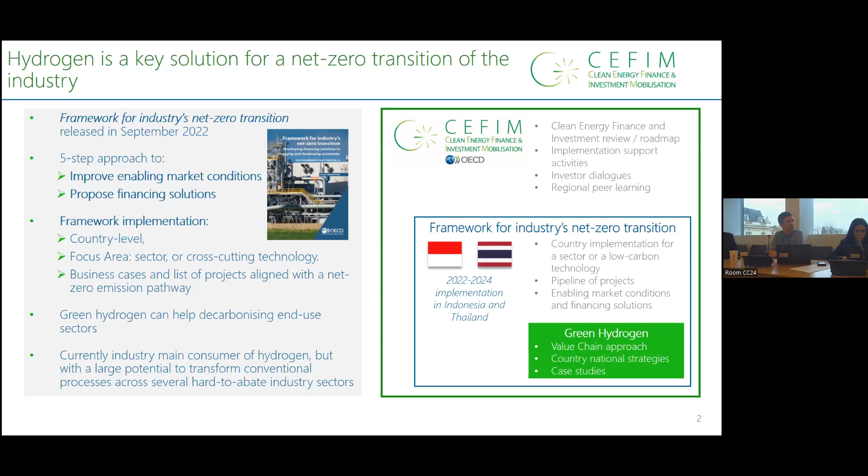This work that we have done on green hydrogen is therefore really much connected to the other activities we're undertaking in those countries. And in the paper, as you can see in the box in that slide, we have adopted a value chain approach to make sure that we're covering from the electrolyzer manufacturing to the end uses of green hydrogen. We have as well identified a few questions on how could countries establish national strategies to create enabling conditions. And we also propose 8 case studies of flagship projects.

So a very short reminder on hydrogen contributions to the global energy mix. Hydrogen is today well recognized as one of the solutions that can help achieving net zero by 2050. And most of the pathways that are aligned with net zero today show that compared to the current level of green hydrogen demand that you can see on the left bar in red, we will see a 5 to 6-fold increase in hydrogen use. And most of this hydrogen is deemed to be green hydrogen or low carbon hydrogen by the time.

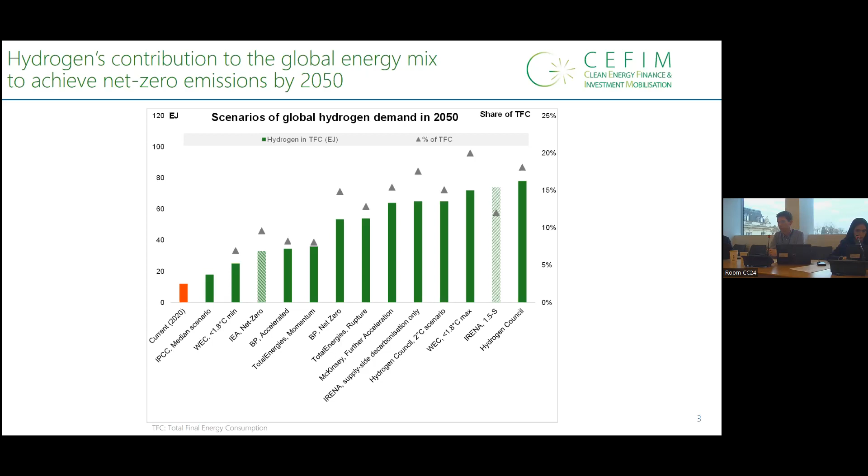Another key element, and this is really the backdrop of the working paper, is to address the entire value chain of green hydrogen. It's especially complex. So we have an upstream part, which goes from the manufacturing of electrolyzers that themselves can require critical minerals and therefore some mining activities, to the availability of upstream resources, which are primarily water, as well as cheap renewable energy or low carbon electricity sources. So primarily wind and solar today, but of course low carbon hydrogen can be produced as well, for instance, out of biomass.

On the midstream part, this is the production itself, and you can see here the importance of storage and transport. That means that enabling infrastructures will be key, and that having them in a country will be a critical area to develop a sound green hydrogen market. And you can as well see in the dotted line the conversion, transport, and exports to the downstream, meaning that green hydrogen is a molecule that can be used in the industry, but in order to trade it and to export it, it may have to be converted, for instance, under the form of green ammonia.

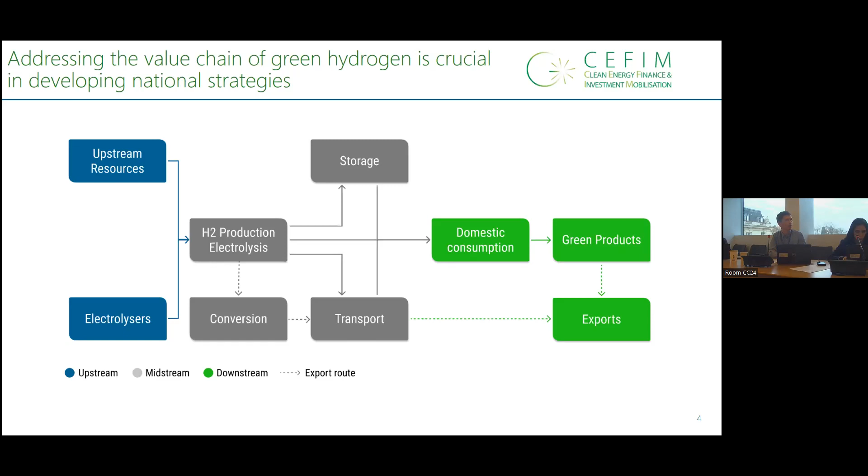Finally, what you can see on the downstream parts, and that is particularly relevant for emerging economies that have good conditions to produce green hydrogen at low cost, is that the consumption could take place, of course, as domestic consumption directly under the form of green hydrogen, could go through exports, but could also be done under the form of green products. And that means that having green hydrogen at low cost in the country could also provide an opportunity, for instance, to manufacture products such as green ammonia or green steel and develop the downstream industry.

So as we can see in the value chain, especially for emerging economies, there is a good momentum to develop green hydrogen, but it could be for domestic use as well as for exports. And we have also observed over the last years that many governments were working on partnerships to develop hydrogen trade.

This is illustrated as well by some of the first projects and large projects that we have seen in emerging economies. So here we just take an example that you can also find in the paper about HIF Global. It's a project of e-fuels production in Chile, so mainly on methanol. And the purpose here is to first produce green hydrogen, but also to combine it with CO2 capture in order to produce gasoline and export it then for the mobility sector across the world. So again, to emphasize the importance of trade for these first flagship projects to emerge.

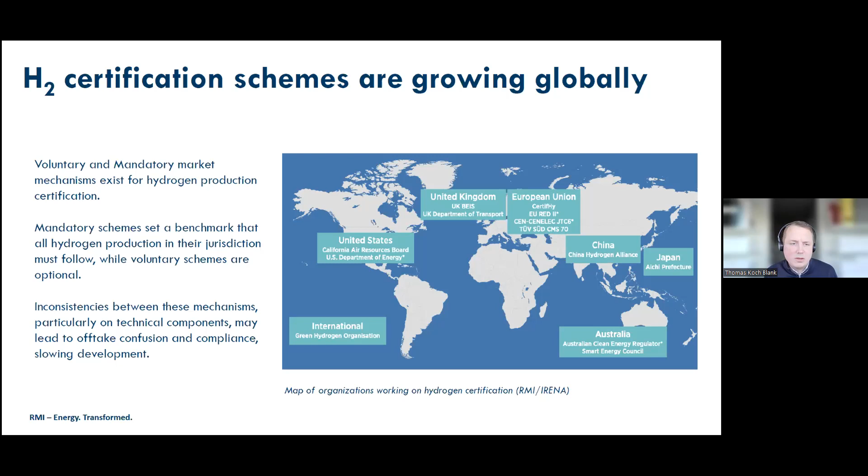So what is, I think, strongly recommended, or what we see is valuable, is that at least the technical components of the certification scheme become harmonized. So you harmonize on the scope of what you actually include and what you consider to be required to report on, if you like, as a basis for this attribute that you want to provide your customers. So what are the system boundaries? How far upstream do you go? Which components are included? Which kinds of greenhouse gas emissions, and so on?

Is it only a green hydrogen, to use the simple terms here, is it only a green hydrogen standard, or is it a standard that also allows for other production pathways to transact in the same market, and so on? So there are a couple of technical components that are important to align on, but achieving a single standard, as I think Sam also referred to, is unlikely, but harmonization and some level of compatibility will highly improve the transactability of the market. Next slide. And I'll leave you with this.

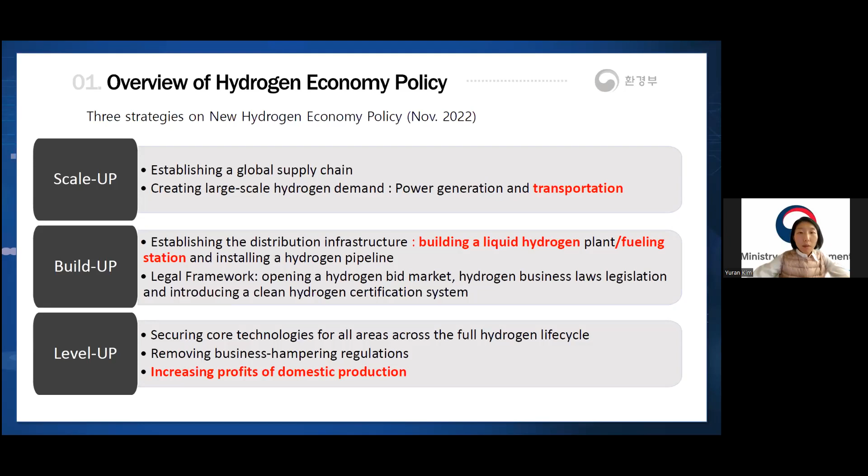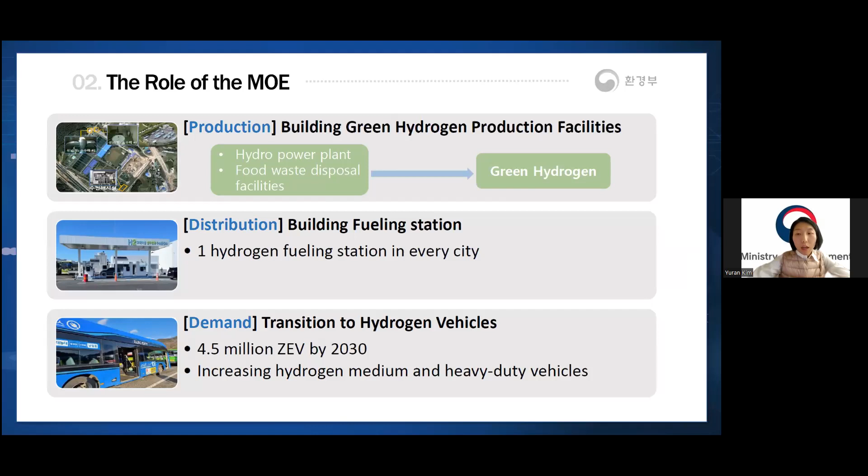Based on this plan, the Ministry of Environment is in charge of these red parts. Next, please. Here is the summary of the role of the MOE considering the life cycle of hydrogen. First, producing green hydrogen based on our environmental infrastructure, hydropower plants in water purification plants, or organic waste disposal facilities producing a lot of biogas, and building hydrogen fueling stations and supporting transition to zero emission vehicles, including hydrogen vehicles. Next, please.

The MOE has invested mainly in two types of green hydrogen production plant. Type A plants use water electrolysis technology in water power plants. K-Water, the public organization in Korea, started the first project in Seongnam, a city adjacent to Seoul, by using its small hydropower plant at a water purification plant. It is expected to produce green hydrogen this year and provide hydrogen to nearby fueling stations. There are two more similar projects in Chungju and Milyang. The Chungju project is the largest among the MOE's projects. Next, please.

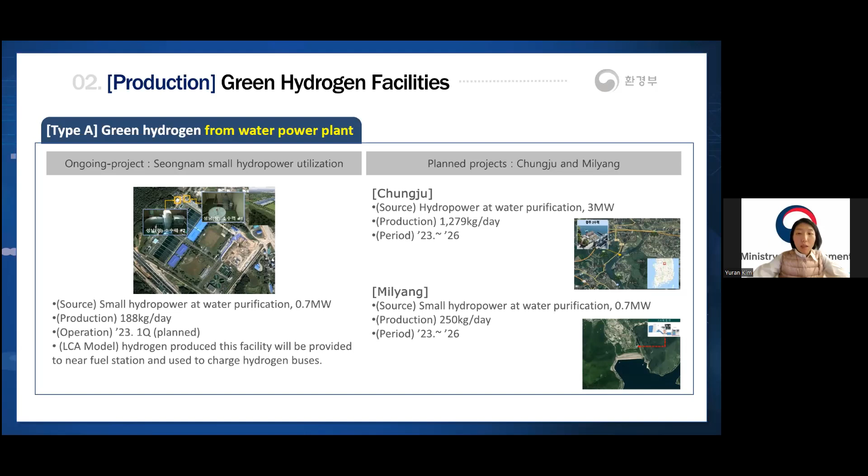Type B plants are at the very beginning stage, which extract hydrogen from biogas. Korea has above 100 biogas facilities treating organic waste such as food waste or sewage sludge. The MOE has a plan to select two projects in 2023. Next, please.

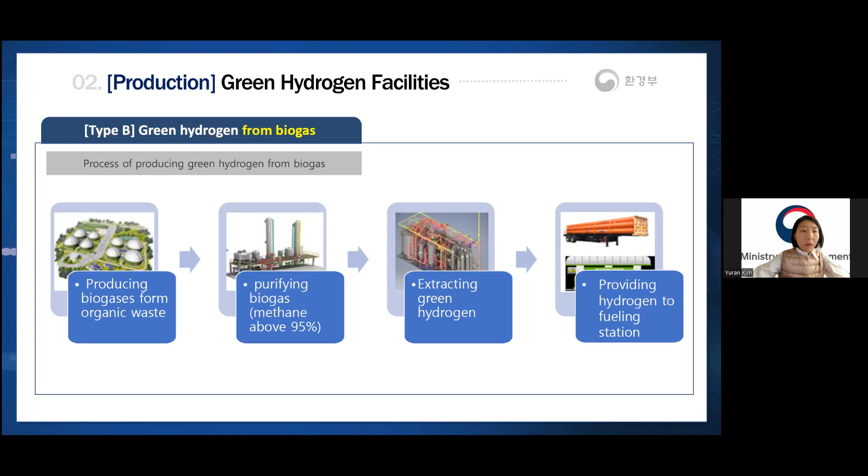The next part is about hydrogen fueling stations, one of the most important parts of Korea's hydrogen policy. Until 2022, the MOE built 229 fueling stations and aims to expand to 320 by 2023. In 2018, there were only 14 fueling stations in Korea. The performance achieved in the short time is based on active efforts of the government. For example, the MOE led efforts to find suitable sites to build fueling stations and shared the information with related industries who have an interest in building or operating fueling stations.

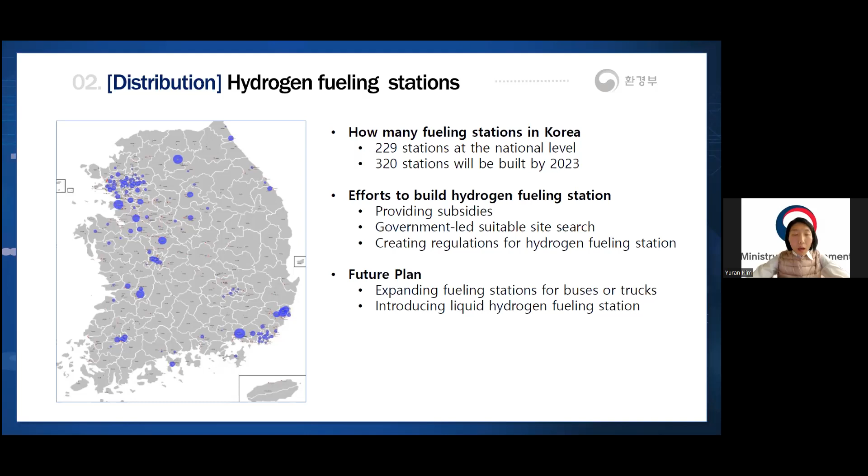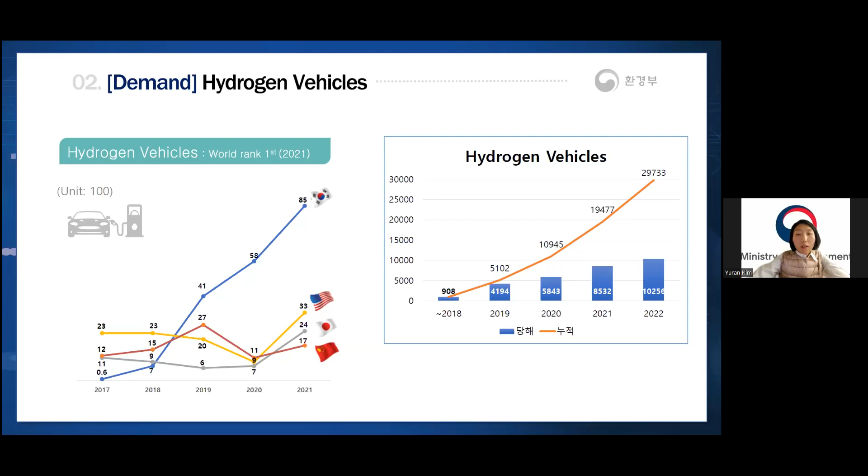Next, please. The last part is about hydrogen vehicles. In 2022, over 10,000 new hydrogen vehicles were on the road. You can find that the demand for hydrogen vehicles continues to increase every year. In 2021, Korea ranked first in the world on hydrogen vehicle distribution. Next, please. Furthermore, the MOE expands the policy target from light-duty vehicles for individuals to medium and heavy-duty vehicles such as buses or trucks.

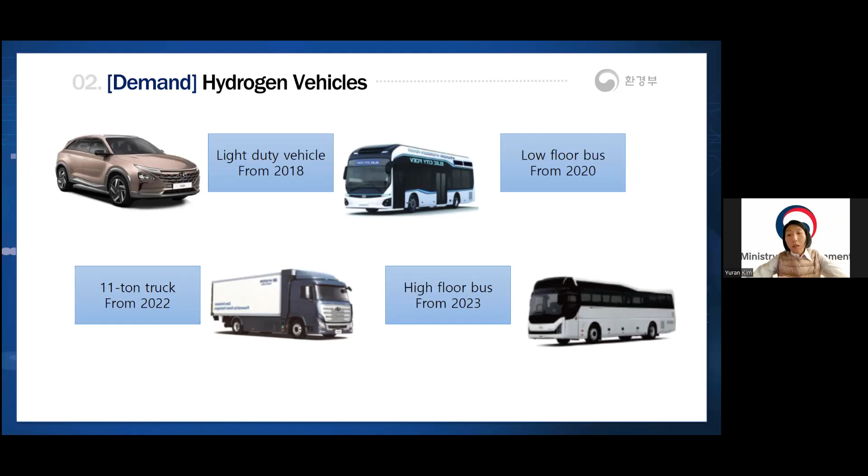Honestly, the market size of hydrogen heavy-duty vehicles is very small because these vehicles launched from 2020. Low floor buses, which are usually used as city buses, sold over 100 every year for the last 2 years. It was a really amazing performance, I think. The MOE has actively created demand for hydrogen buses or trucks by collaborating with local governments. For example, Busan, the second largest city in Korea, has a plan to transition its around 1,000 city buses or commute buses to hydrogen buses by 2025. Next, please.

Lastly, as producer and end user of green hydrogen, the MOE deeply agrees that green hydrogen production should be expanded. On the other hand, we also keep an eye on the high unit cost of producing green hydrogen, because there is the possibility that hydrogen vehicle drivers will be burdened due to the increase in charging costs. It is the end of my presentation. Thank you.

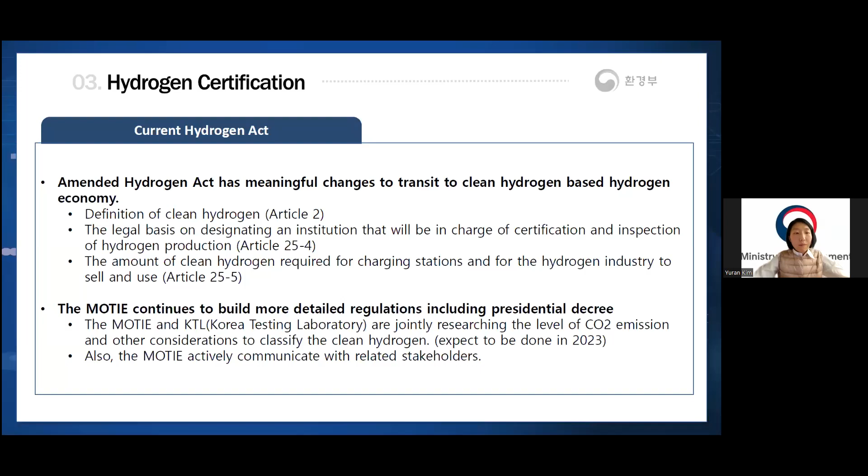Thank you very much, Yuran. And it is also very interesting to see that the Republic of Korea has introduced some definitions of clean hydrogen as a basis before working on and establishing the institution for certification.

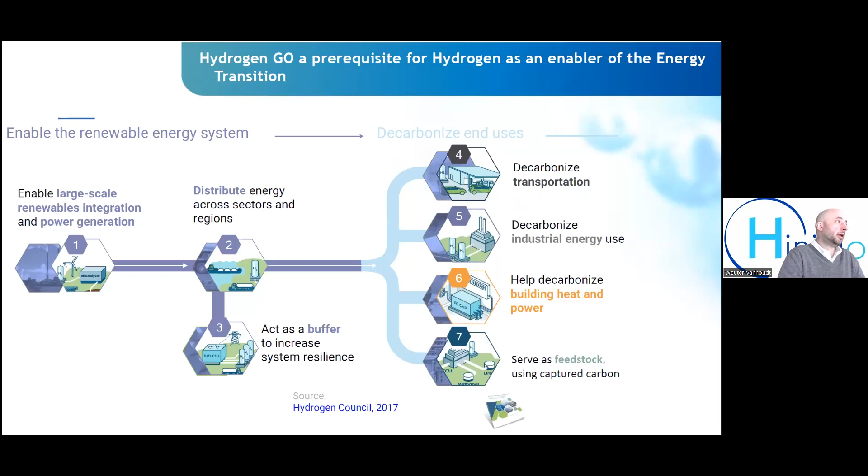I had two slides, but I think they've already been presented by Sam and Thomas before. And so why are we all doing this? Hydrogen in lots of instances is a feedstock, or could be a fuel that is going to help other industries to decarbonize. Next slide, please. Therefore, we have a need for a tracking system going from the carbon footprint of hydrogen into the different end sectors.

And here, I think it's already important to say that, as mentioned by the previous speakers, a lot of jurisdictions, be it Europe, Korea, Japan, Taiwan, or the US, are all putting their own regulation into place in their country, but very often they're also putting a regulation into place depending on the end sector. And that's indeed how we are ending up with various definitions of what is good and bad hydrogen.

And I really use the words good and bad to say that there's a certain subjectivity to it, and that everybody is developing their own labels with their own criteria, whether it's carbon footprint alone, whether it's also looking at the primary energy that's being used, is it coming from renewables or not.

And then we also look at other programs which are going even further into the sustainability criteria, typically looking at water, air, and land, or even going beyond, looking at the impact it can create domestically, like GH2, but also H2Global. And this means that we're getting really a variety of markets. If you go to the next slide.

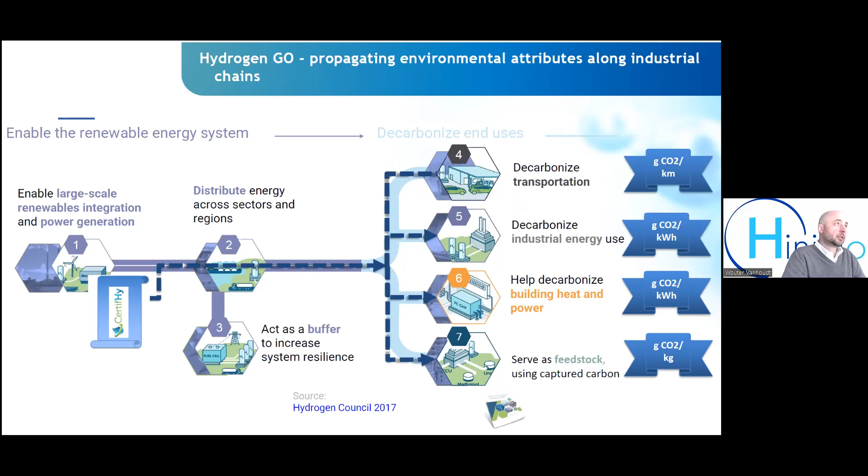And there, I would like to stress that the markets in a lot of instances are driven by regulation. And it's afterwards that certification systems are put in place to make sure that they can track and check compliance with a certain regulation. And the disharmonization or the divergence of the definitions of what is good and bad, some people will call it green, blue, etc. They widely differ, and that means it's going to be harder for international markets to find their price premium.

This is leading to a lot of the certificates not being fungible. And that we're not only seeing on the mandatory markets. Currently, we also see a whole lot of voluntary schemes being made. We have so many standards out there by the certification bodies, by CertifHy, which is one that I've been developing myself, by the GH2 standard. And also in those voluntary markets, there are so many certification systems that it becomes very hard to compare apples to apples.

I always compare it to bio chicken. When I started to buy bio chicken 10 years ago in the supermarket, every brand used to have their own bio chicken label, and all of them were expensive. And because I couldn't see a common label of trust, many people just ended up buying the cheaper non-biological chicken. It's only when governments, like for instance the European Commission, standardized one or two bio chicken labels that we really saw the uptake going forward.

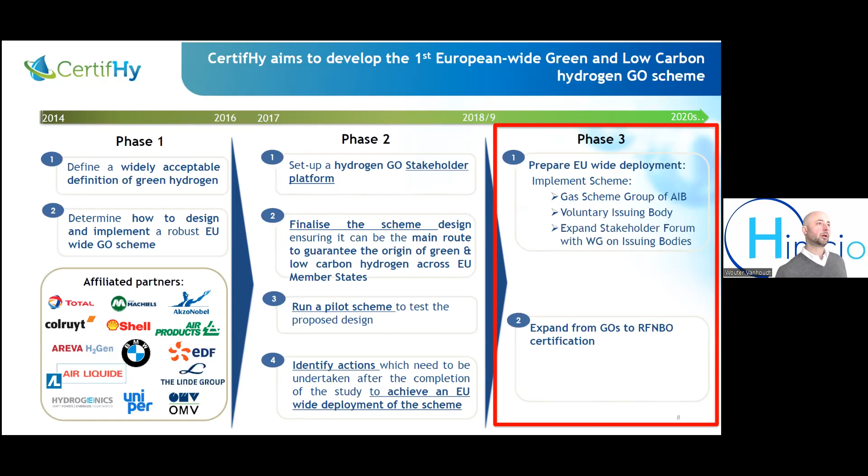I think that the industry can perfectly start trading as long as the data sheet of the hydrogen is made in a similar way internationally. And I would just like to say that we already have been going through our piloting phase in 2017, 2019, and now we are going forward with other objectives. And maybe just to give in a nutshell certain ideas, and we can skip 2 slides, I think. Yeah, so the one before.

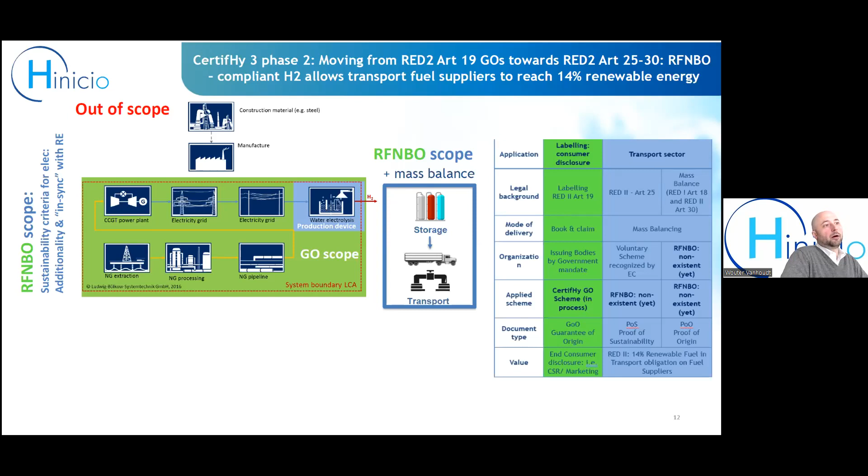And now with the upcoming new regulation in Europe, the famous RFNBOs, we see that the certification needs to be well to engine. So that means that we need to increase the scope of our footprinting. And we also need to change from a book and claim towards a mass balance system. So this is one of the main points that we're working on today. In parallel, and maybe that's going to be my final slide, we're also helping a lot already to see how the hydrogen certification that we've been working on can be used in downstream applications.

So Hinicio as a company is working very closely together with Fertilizers Europe to make an ammonia certification scheme. By the way, we're having similar assignments with the Fertilizer Institute in the US, as well as the Global Ammonia Energy Association. So I would say there we're trying to see how we can expand from a hydrogen scheme into the derivatives. And I would also like to mention that we recently signed a memorandum of understanding with the Roundtable on Sustainable Biomass, and RSB is particularly strong at the sustainable aviation fuels. So that's one of the topics we will collaborate on.

And there, I think it's very important to indeed make sure that the basis of hydrogen certification are being repeated in different end sectors, and that those end sectors don't start with their own certification scheme from scratch, but you need to keep on building on top of pre-existing building blocks to make sure that certification along the value chain can be done in a very systemic and incremental way. And I think those were the main messages that I would like to bring today. Thank you.

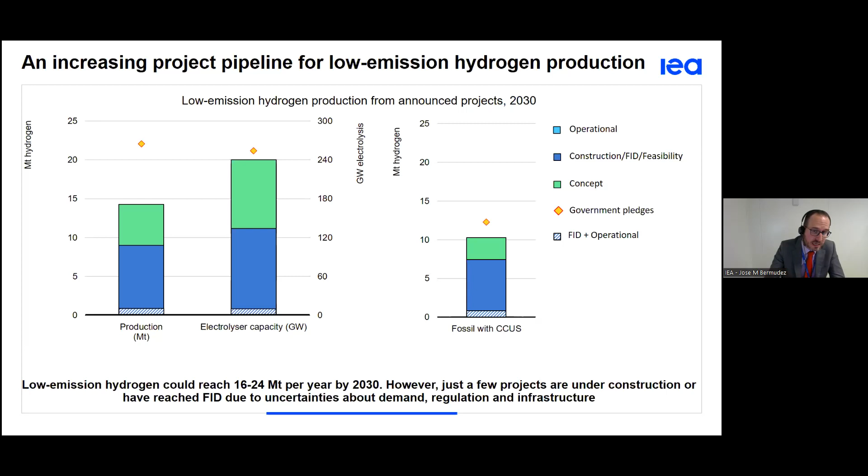Governments around the world have a critical role to play in facilitating coordinated and timely investments on hydrogen. And this means in particular setting clear policy frameworks that are compatible across borders. This does not mean that governments will need to dictate the precise format of the traded hydrogen products, but rather to agree about the standards that are needed for environmental criteria, or the policies that are needed to incentivize end users to commit to long-term purchases and manage offtake risk. In both areas, international coordination will be essential to allow cross-border trade to emerge and to contribute to government climate pledges.

As a consequence of this, standards and certification for warranting that hydrogen and its derivatives, I will refer only to hydrogen, but it's always hydrogen and its derivatives, meet those environmental criteria. So this topic of standards and certification has emerged as an important issue for project developers. Investors seek upfront certainty that the output of those projects in which they want to invest will meet the regulatory obligations, right? Which could be that a share of the total hydrogen demand comes from low emission hydrogen, or that it meets a certain threshold to be eligible for funding instruments.

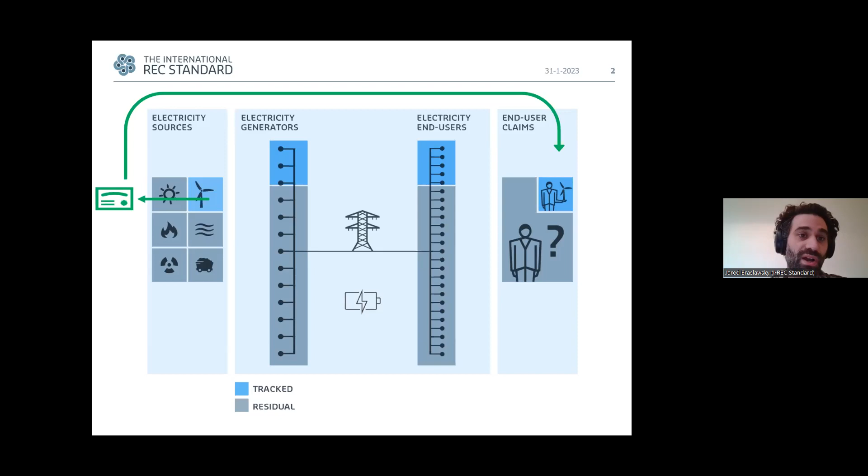So some previous speakers said, this is part of that building blocks. The tracking system for hydrogen is building upon the tracking system of, for example, electricity. And I couldn't agree with that more. Electricity plus computers is data. Electricity plus metal ore is aluminum. Electricity plus water at its simplest form is hydrogen. So to ignore the electricity discussion, or put it as a secondary thought when it comes to hydrogen, is a mistake, because we need to recognize for the last 25 years, end users have been making claims to renewable electricity. And you see that through the mechanism on the screen, very simplified, where a certificate is given to a renewable electricity site and it's consumed by an end user.

Now, this already shows that a tracking system itself is not a statement of opinion, it's a statement of fact. And this fact is very, very important to say that there is a user that is procuring coal on the grid. And it is a fact-based, technology agnostic statement to say someone is procuring wind and someone is procuring coal. This tracking system itself is not responsible for making a value judgment.

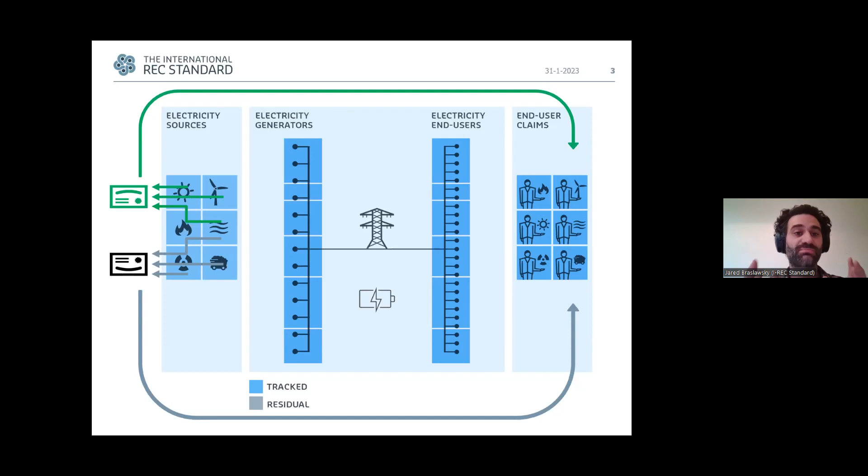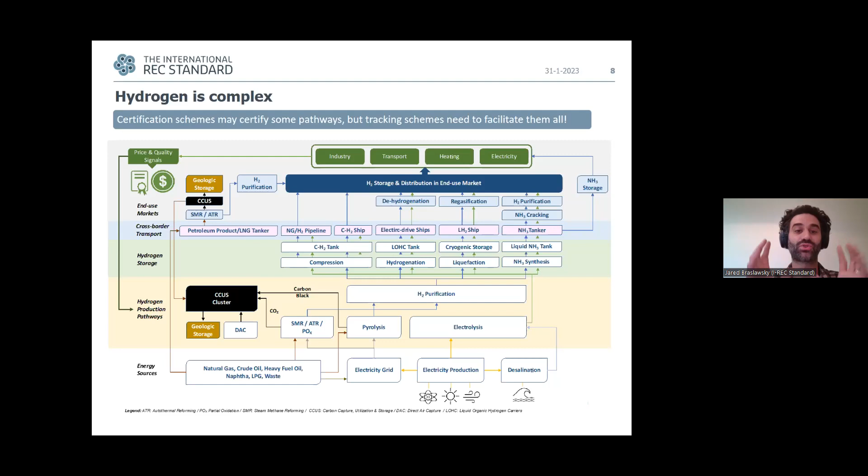Next slide. For example, with carbon dioxide removals, the EU is already looking into them, and they're definitely going to play a role in hydrogen as well. What is then the price discovery between a carbon dioxide removal ton and a point source reduction ton? What if that point source reduction was for mineralization? What if it went to EOR? All of these things will play an important role in determining the carbon content of the associated hydrogen. As a result, we don't want to decide that this is necessarily the only carbon footprint available.

We're going to allow that to be allocated on top of the certification itself by other entities. I'll talk about that in a bit more detail. Next slide. And then, of course, you need to look at other aspects.

For example, the electricity. Can the electricity be booked on a 15-minute basis or an hourly basis, an annual basis, or a quarterly basis? This was already a discussion within the RFNBO criteria within Europe, and is definitely going to be a discussion down the line as we start moving towards more granular accounting frameworks.

So we've already done 24/7 accounting, renewable issuance and accounting, for example, Google with their Chile data center. But we've also worked, for example, with BMW and Emirates Global Aluminium on the creation of renewably produced aluminum from Emirates Global Aluminium being delivered to BMW.

So a lot of these things, it's not necessarily that we want to come up with the solutions. We don't. But we want to come up with a clear way of defining the facts. So at least we've got a fair analysis of what actually took place for other entities to make determinations associated with applicability or not, potentially to various legislations. Next slide.

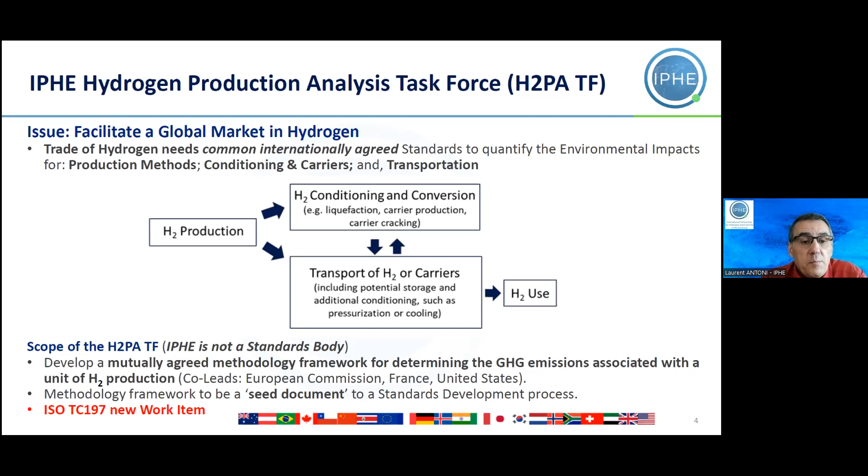So we published in '21 the first document only focusing on production, and for the last COP 27, we released the second chapter dealing also with conditioning of hydrogen carriers. And here you have the list of the different hydrogen production pathways. So you may see that we did not consider all the pathways, but we considered the most relevant ones, at least from the government point of view.

And also regarding conditioning, here liquefaction, ammonia, and LOHC, but there might be some others in the future. And we aim at finalizing the transportation part by this first quarter. And what is also most important, as IPHE is not an international standardization organization, it's not in the remit of IPHE to create standards, because it's not really, I would say, legitimate to produce this kind of standards.

So that's why we have transferred that work to ISO, the Technical Committee 197 Hydrogen Technologies. And I just encourage people who are interested to contact their national mirror committee to be nominated as one of the experts of that specific working group. Next slide, please.

And now this work has been transferred to ISO, and normally we should provide a technical specification by the end of this year, as mentioned previously for COP28, and have an international standard one year later. So now the next step is also to work on a certification mechanism. And that's why at IPHE, we have created that specific task force.

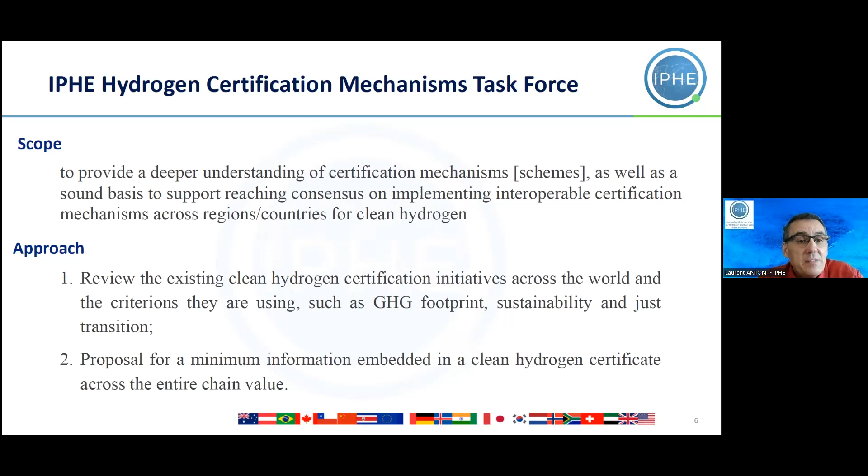You may know that there are now many different hydrogen initiatives in the world. 20 years ago, when IPHE was created, IPHE was the only one working on hydrogen, but now you see there are many different organizations dealing with hydrogen, and that's great, because it shows that hydrogen is now quite high on many agendas. But now it's very important to coordinate all these activities.

And here I would like to take the opportunity to speak on the Breakthrough Agenda, an initiative which was launched during COP26 in Glasgow, 2 years ago. And the idea is really to coordinate, next slide, please. And different countries have agreed to back hydrogen actions. And here you can see the 5 different actions on hydrogen. And the first one is to accelerate development of hydrogen standards.

And including regulations, standards, and certification. And it has been agreed that IPHE will lead that H.1 priority action in collaboration with IEA's Hydrogen TCP, with IRENA and other entities. And so here we really want to put in place some specific actions in order to deliver for next COP28 some concrete advancements on how we can put in place common, or at least mutually recognized, regulations and mutually recognized certificates.

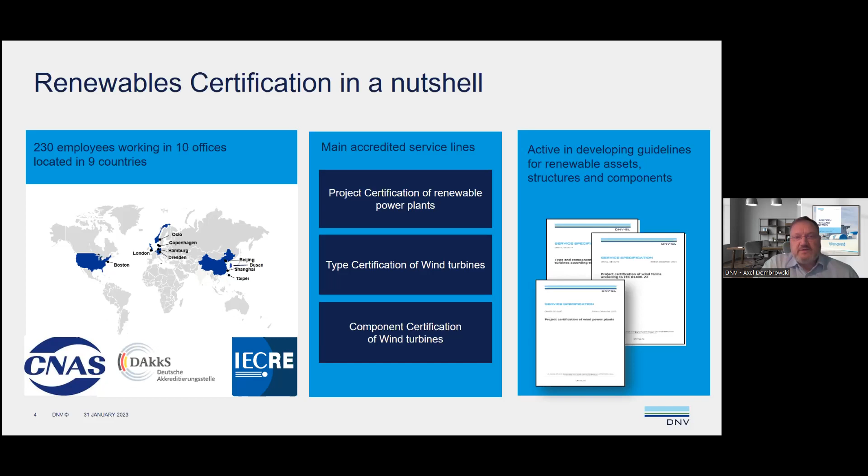Now on the next slide, you will see that we made a joint industry project, a JIP, as we called it, and we know that a lot of different standards are already there for designing such hydrogen plants, and the safety aspects are maybe also already acknowledged in oil and gas applications. And some of the developers are asking us, how is the quality, how is the performance of such a hydrogen production plant?

And at the end, last year, we started with that JIP, and you see here the partners. And additionally, last week, we announced on LinkedIn that we now have also one bank with Societe Generale and also one insurance company like Swiss Re in our JIP. So we got a lot of different views on it.

So it is not only the electrolyzer manufacturers who deal with that kind of standard after a while. It's more about how is the bankability, how can that be insured. We are looking actually, and that's maybe a motivation for you, for authorities who are keen to understand how this JIP or this outcome might be a standard at the end, a globally acknowledged one, and how we can deal with that. And here it's more about these red colored design regulation and safety aspects we are dealing with.

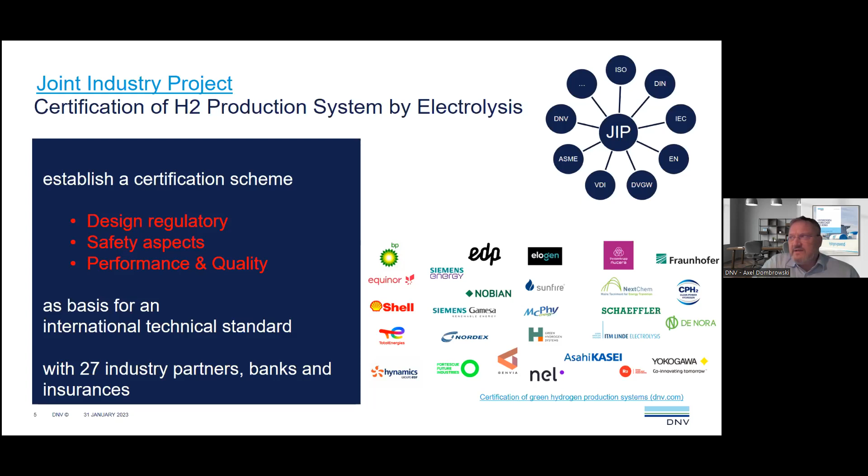And in the next slide, you will see, or you have already seen, that it is totally complex. Also here, if we are going into the assets, not going into certification of the colors or clean hydrogen. And I only gave you a small aspect of hydrogen production, but transportation, storage, feedstock, all that kind of things, and also to do with ammonia. We have to tweak again our knowledge.

And what we are doing in DNV is we are the enablers. So we can bring them together on one table, think about it, maybe make a standard out of that so that everybody, at least on that table, acknowledges it. And afterwards, we have a hearing, and I invite you all to that in 3 months' time, when the standard for hydrogen production systems will be out, so that you can comment and give us some good thoughts about how we can tweak it even better.

So when I'm coming back to the 3 questions we have already had, I saw already the stakeholders are the end users, steel, concrete, maybe chemical industry, the authorities, the developers, manufacturers of such plants, but also the banks and insurance and authorities are totally important. So we need all of them.

And all stakeholders on that, and how the governments can be improved in that. I think on one hand it's bankability and insurance, so the market will drive us forward to that. But I'm happy if the authorities of all the countries and all the institutions have a good understanding of how we can come together and make this energy transformation available very fast.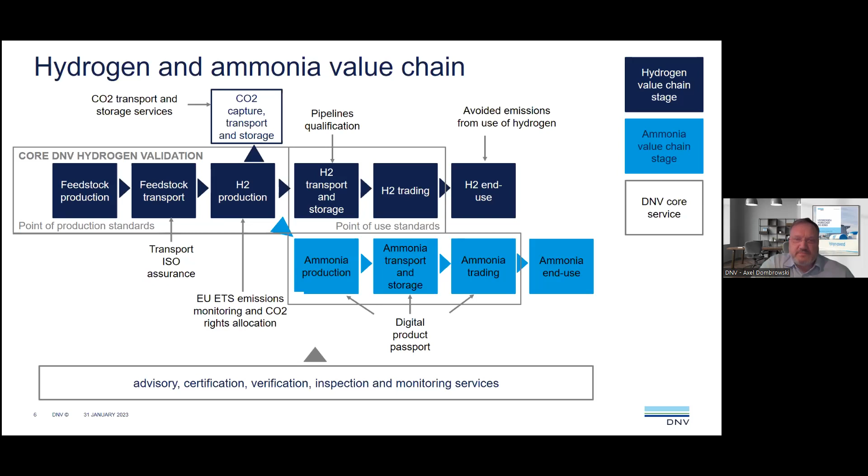So I took only 6 minutes, then it's good to have some more minutes to discuss it. Thank you. Thank you so much, Axel, for being on time and also covering some key issues.

And I think you really highlighted the need for public-private coordination. I must say at the OECD, this is something we've been doing for over 12 years, bridging the gap between investors, other private actors and market participants and governments and public actors on the broader transition to a low carbon economy. And I think specifically on green hydrogen, there's a value here that maybe we can discuss later.

Let me turn to Tudor for his presentation to complement the views. And I think we have a range of stakeholders represented in this session. So Tudor, the floor is yours. Thank you very much, Geraldine, for a nice, kind introduction. So I'm trying to be very, very quick about what's happening in France.

This was followed by the Energy and Climate Law in 2019, which was actually the first step for the hydrogen legal framework, since it empowered the government to issue an ordinance and a decree to put into place the framework for support mechanisms, certification and definitions for hydrogen. This was then followed by what happened in Europe with the German hydrogen strategy and the European hydrogen strategy in September 2020.

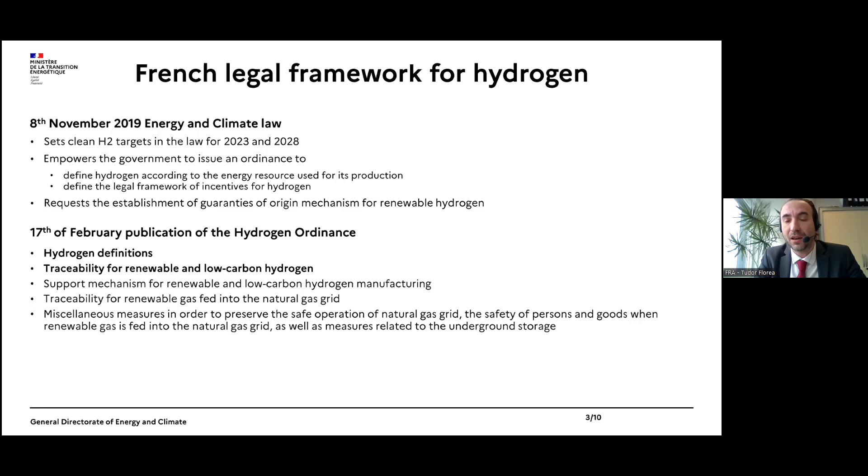So what happened? What happened exactly? Well, in February 2021, there was the publication of the hydrogen ordinance, where we found clear hydrogen definitions, the traceability framework for renewable and low carbon hydrogen, the support mechanism for decarbonized hydrogen, and traceability for renewable gas fed into the natural gas grid, and of course everything that concerns the other part of the value chain, such as the safety of persons and goods for the gas grid, and some measures related to hydrogen bulk underground storage. Next slide, please.

So everything was done, of course, with constant consultation of the stakeholders, and the consensus that was found was that there was a strong will for the consumers to have a physical traceability when feasible, and for the producers to avoid transport or distribution hydrogen infrastructure. So that was what was coming out on this part.

Also, the stakeholders put forward technology neutrality, and also, as already mentioned, regulatory aspects such as safety, town planning rules, technical control, vehicle control, market, training and skills, and everything that is still under discussion today. There were several working groups that had to be set up in order to deal with this issue, and they are ongoing. So what were the results of these consultations for the hydrogen ordinance? The next slide, please.

They brought us to these definitions, because everybody asked government to have a simple set of definitions which respects technology neutrality, and here you go. And I think that France is the only country in the world that has definitions for hydrogen. But first of all, what is hydrogen in French law? Hydrogen is actually the dihydrogen molecule under a certain degree of purity, which I think most likely would be fuel cell quality in France, at least.

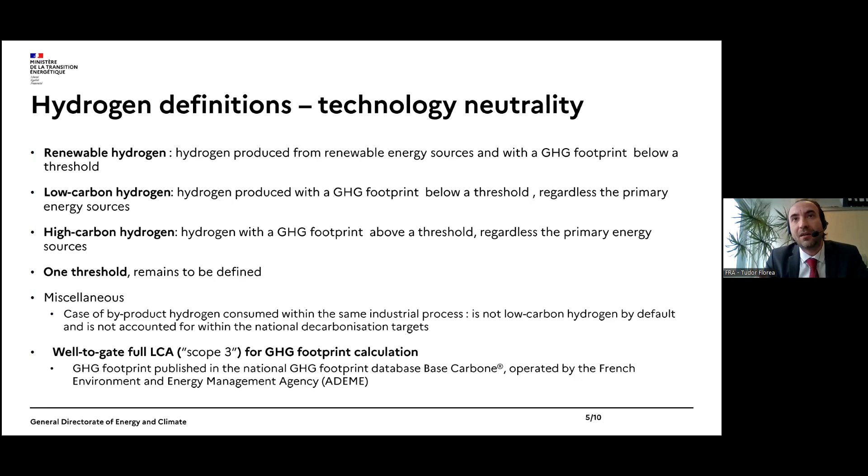And everything is written in the national greenhouse gas footprint database, which is operated by the French Environment and Energy Management Agency. Clearly, someone that wants to produce hydrogen and is happy with the greenhouse gas footprint in that database just uses this value. They don't need to carry out a life cycle analysis. They just take this value, and this national database is also used when decrees or decisions by government are setting thresholds. The reference is this national carbon database. Next slide, please.

And now we are going to traceability. I saw that someone said there's a difference between traceability and certification, which is true. But when you are talking about the origin, what was used to produce that hydrogen, and what is the greenhouse gas footprint of that hydrogen, we may still talk about traceability. So the idea is to have only one book with two options for renewable and low carbon hydrogen. And there are traceability guarantees, that is physical traceability, or in other words, the mass balance principle.

Well, in France, for the time being, there is somewhere between identity preservation and mass balance, since we do not allow the mixing of renewable with low carbon or any kind of mixes of the hydrogen. And then you have the book and claim principle, as you know it for electricity, the guarantees of origin. There is no full disclosure this time, but it's possible to make it happen in the future. So let's say any hydrogen consumer has its free choice between traceability guarantees and guarantees of origin.

And what is most important for those that are consuming 100% high carbon hydrogen, it's clearly that they cannot use the guarantees of origin to greenwash that high carbon consumption, and they have to, let's say, say at some point that they are actually consuming high carbon hydrogen. So we are very attentive on that.

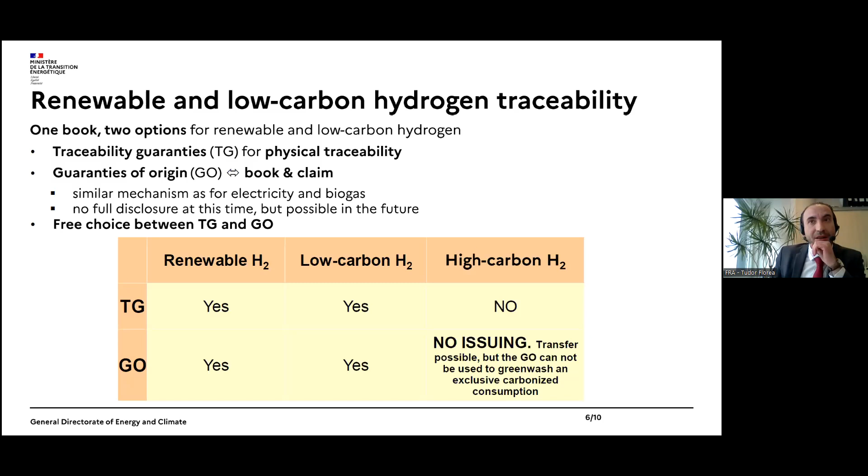Next slide, please. Tudor, thank you so much. And so sorry, can I encourage you to wrap up so we can have a short conversation afterwards? Okay. I'm sorry, thank you so much. It's the last speakers.

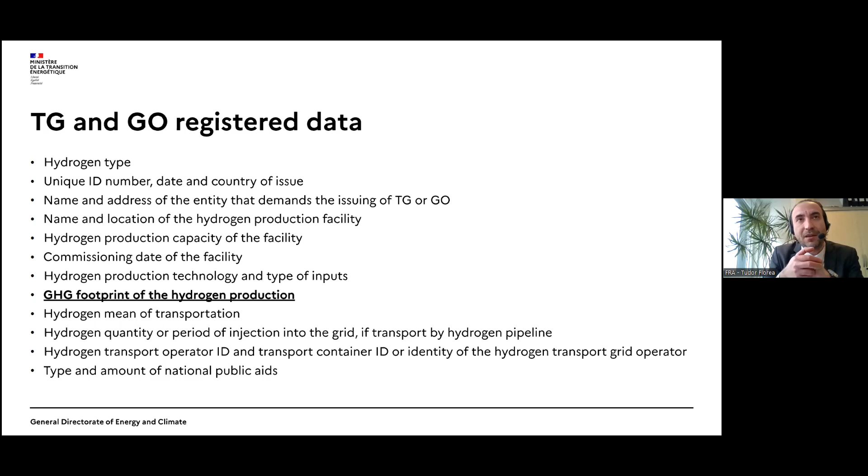Okay, thank you. So what is, let's say, rather new is that for the guarantees of origin for hydrogen in France, the greenhouse gas footprint is mandatory, because you were speaking about some standards. There is a standard related to the guarantees of origin, a European standard. Next slide, please. Next slide, because this is actually what was happening.

So the key message is that France remains committed to apply the rules of the physical reality. So it's the physics that are making the law, not the law that is making the physics. Then the rules and criteria for hydrogen certification must be aligned with the most ambitious ones. So if some other country has more ambitious criteria, then France will follow, but not the other way.

France has its own hydrogen certification mechanism, and it is the government which is behind that and which does the verification. This is very important. And France also will keep looking very carefully at everything that concerns the voluntary schemes and their recognition, and most importantly, France's commitment against any form of greenwashing is and has always been at the heart of its energy policy. Thank you very much, and I'm open for your questions.

Thank you so much, Tudor, and thanks for reminding us that while international harmonization is very critical, we also need to ensure that we don't lower the stringency of certain national circumstances. So thanks for reminding that. And I think it's a thin balance that we see not just in green hydrogen, but across sustainable finance issues globally these days.